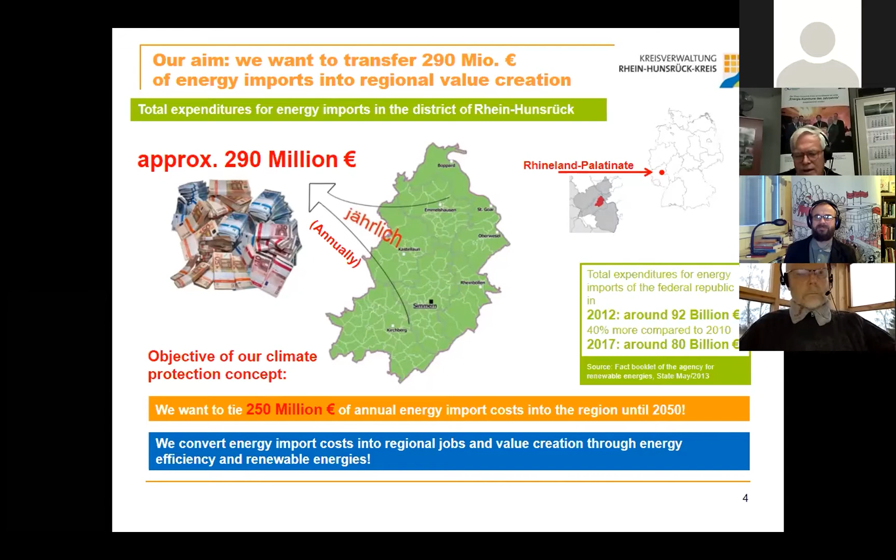Some years ago, we were very surprised that the total expenditures for energy imports in the district of Rhein-Hunsrück were more than 290 million euros, plus nearly 25 million euros in tax on electricity going to Berlin. This is for traffic, for heating, for electricity. And the question for us was: why do we send so much money in the direction of Putin and Arabic countries? We want to keep a lot of these millions instead of paying energy import costs. We want to create energy efficiency and renewable energies, so we convert this import cost. On the right side, you can see the large sums for the Federal Republic's energy imports — 2012, around 92 billion euros; 2017, around 80 billion euros. So there are a lot of chances for new kindergartens, schools, environment, nature, and so on.

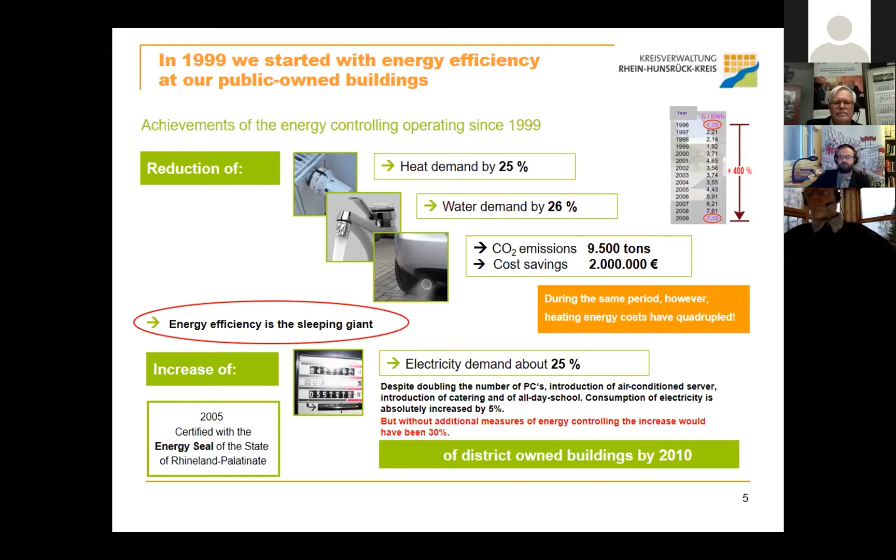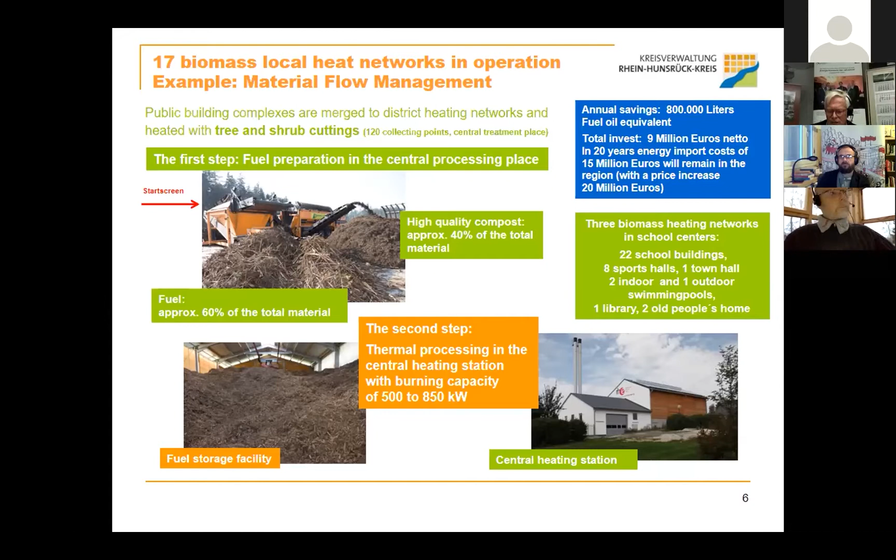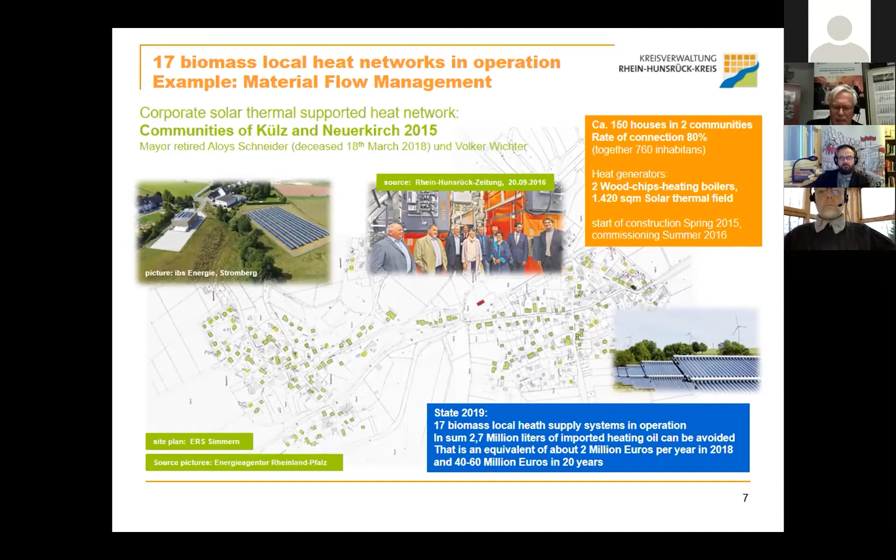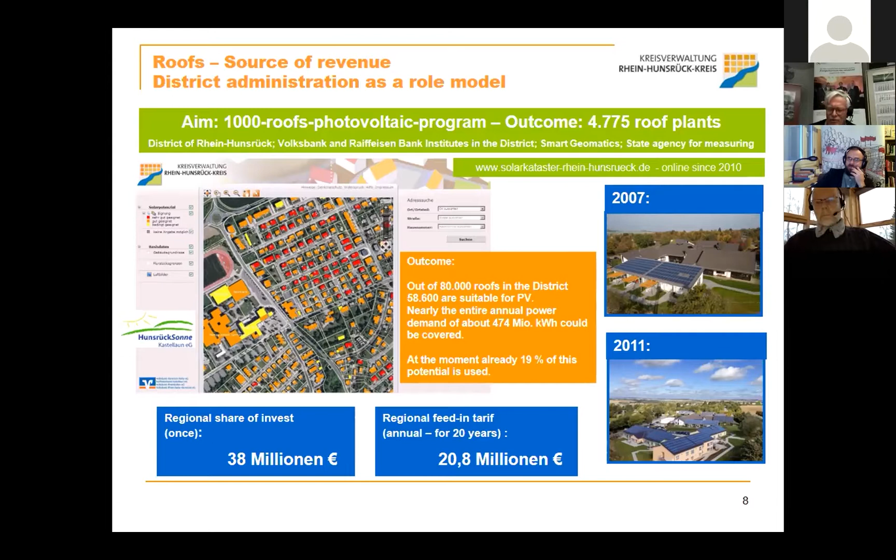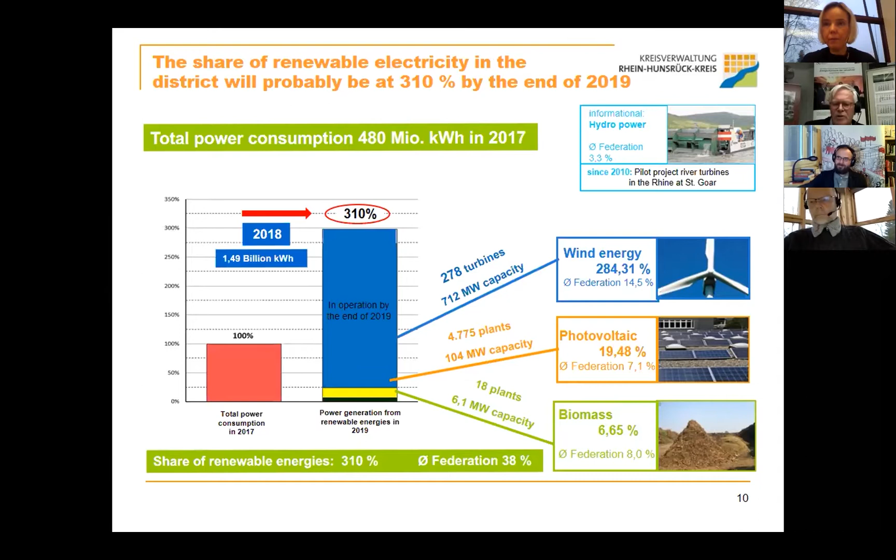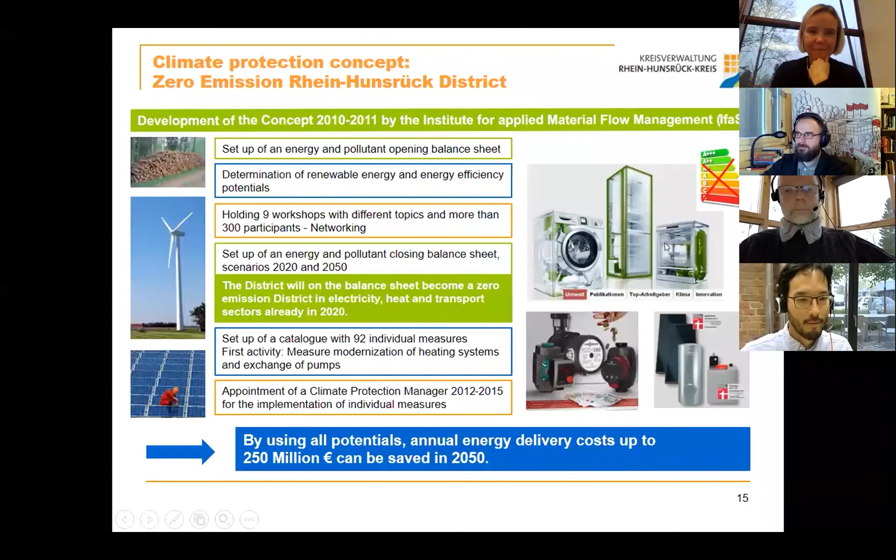Ja, 16. So we are on slide 16. Can you hear me now again? Yeah, everything okay? Please apologize, I will hurry. We were just talking, no, 16.

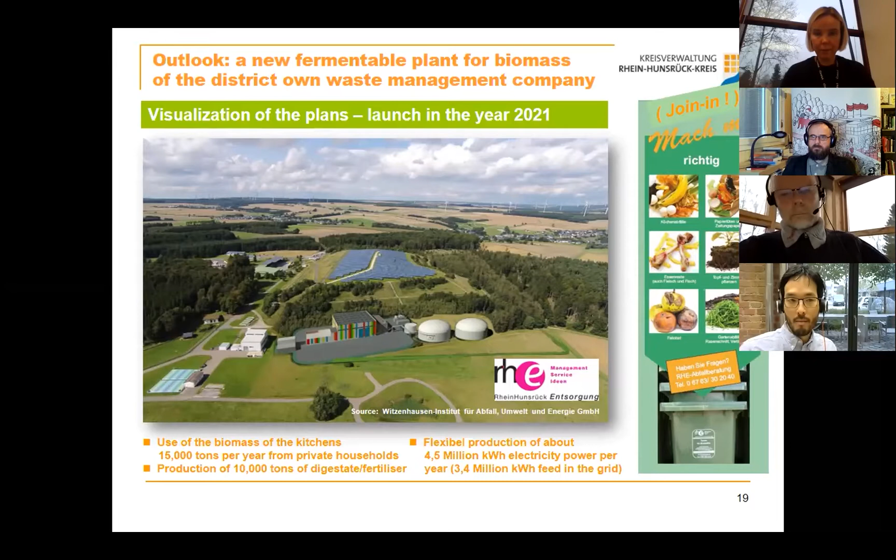His vision was that the money of the village shall remain within the village. That was for the farmers, for collecting the harvest and so on, and to buy fertilizer together as a village, by hundreds of people, for a better price. I think we do it the same way. We want to produce our own energy. We want to keep the value added in the region. And so I think Mr. Raiffeisen is looking down on us and is very glad.

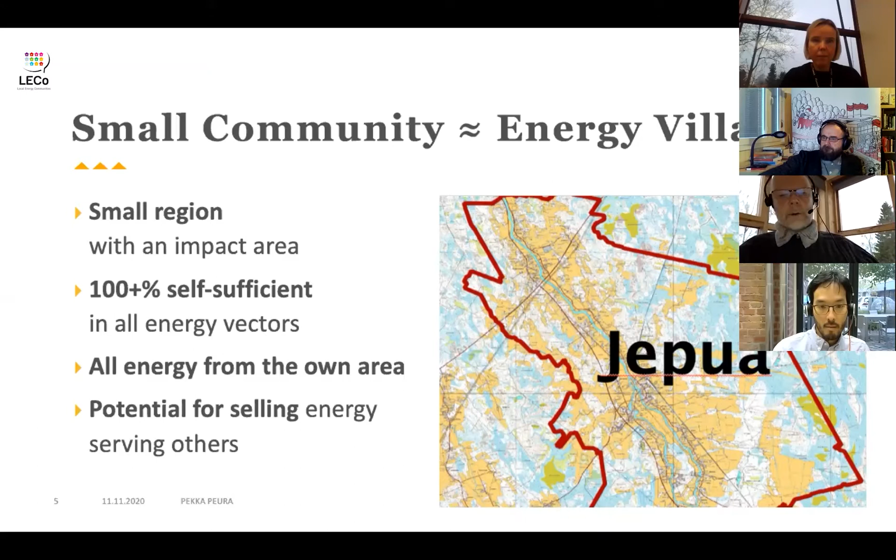We also already touched on the regional economy, and we know from our calculations that the average sum of money spent on energy is between 4,000 and 5,000 euros in Finland's rural regions, which is a huge sum of money per person, per family.

But even if we take a village of 100 persons, 500,000... 1,000 persons is 5 million. But if we take a number of villages, we get a really big amount of money, as we heard in Bertram's presentation as well.

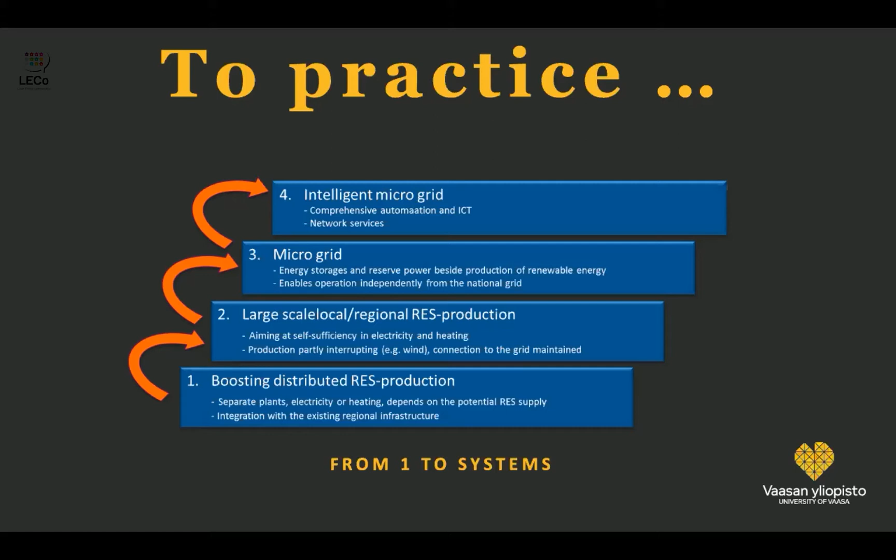We also have to remember that sustainable energy not only means production of energy, it also means minimizing the consumption of energy. So we talk about rational use of energy through different technical possibilities. And then we, of course, have to also produce energy, and there we have these renewable energy technologies. By different combinations of this, we can produce different degrees of energy self-sufficiency.

Again, one more picture about how to put this into practice. We usually, when we go to a village, follow this procedure: we take all the stakeholders with us. We let them say the vision and define all the possibilities towards implementation. Of course there must be some technical expertise and technology providers to put this on a realistic base. But this is just to depict the character of the process — we really need to take all the stakeholders with us.

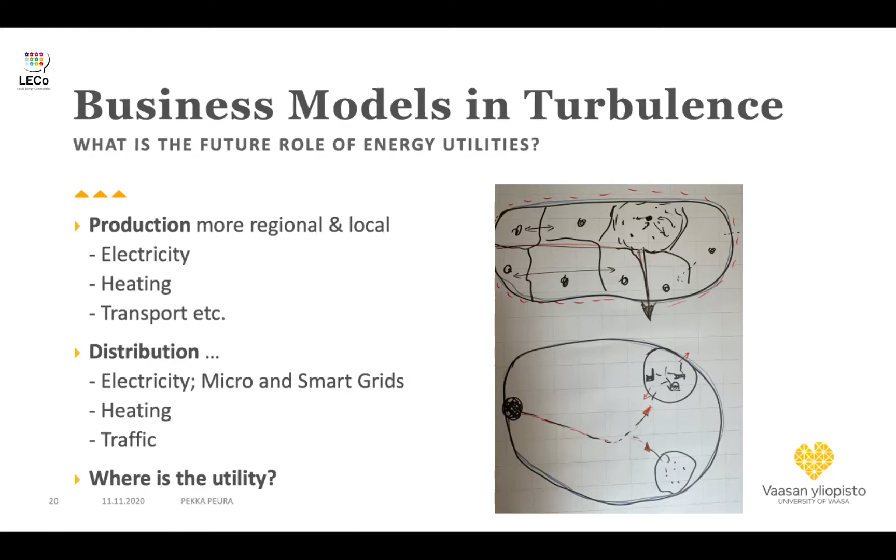Either they could be an active partner in creating this kind of system and structure, which is a long-term goal, or they can oppose it. But more and more, I've seen that energy utilities are turning to be active partners.

And if we take a vision, concluding all of this, what I've told is that we could really create a new structure into the energy sector, which means the centralized system doesn't disappear, but its role could be moved to serve energy-intensive industries and larger population centers, and it also might change and alter its raw material base. But the other side is to construct this distributed strategy, which is what renewable energy is mainly all about.

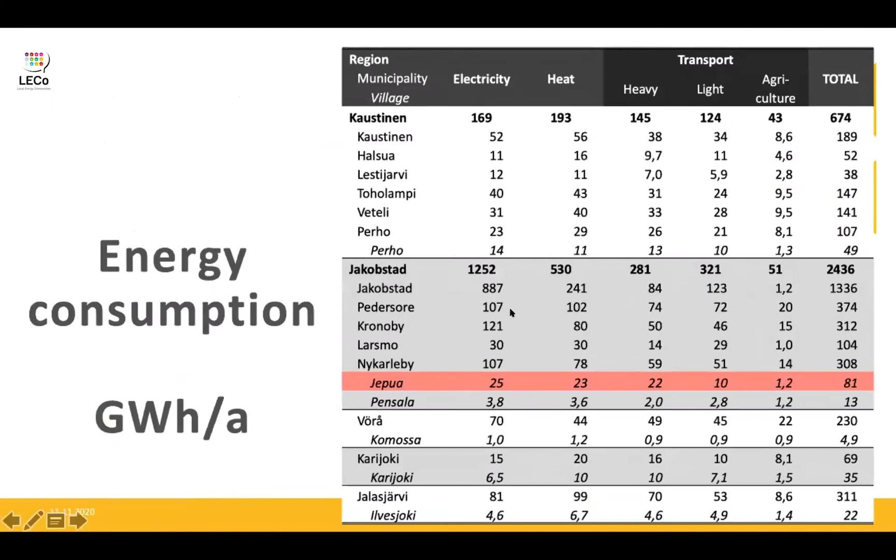My prediction is that the energy sector will experience this kind of disruptive change in terms of turning to and shifting to renewable energies. Thank you.

Thank you, Pekka, for these very interesting remarks, and for ending with such an encouraging message. That will wrap up the first session, and we will certainly hear more about the term energy village later in this conference, and also I think the microgrid approach is already practiced in the Rhein-Hunsrück area. So Pekka, whenever you have the opportunity to visit the Rhein-Hunsrück, it's highly recommended.

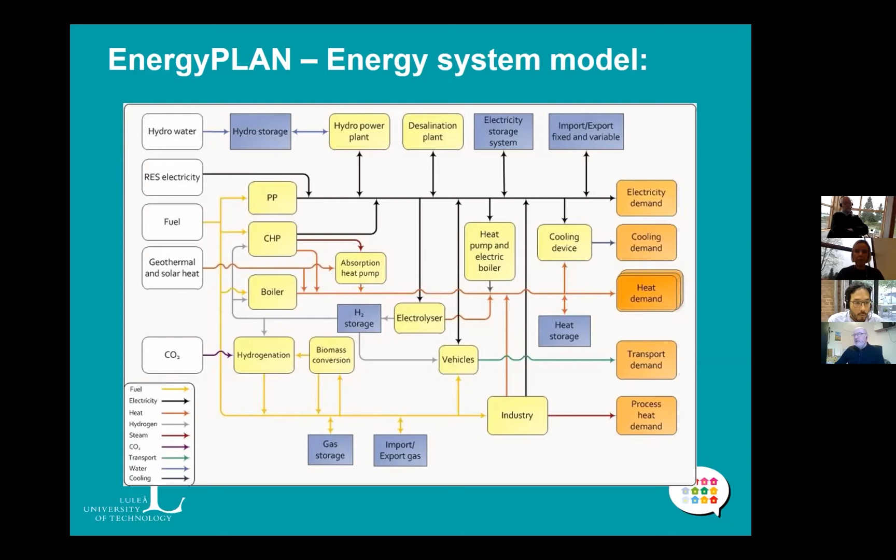How does it look like? We have user interfaces for defining demand. This example is for heating - individual heating in the upper part and district heating in the lower part.

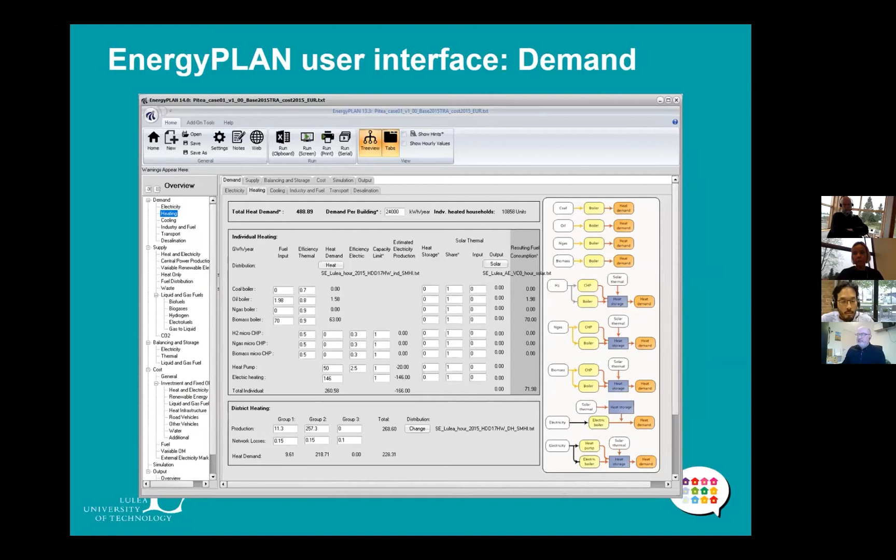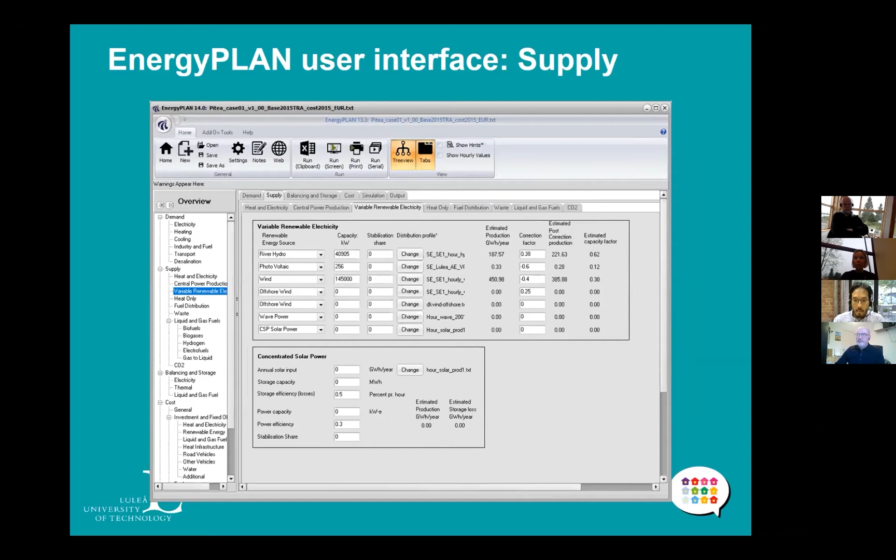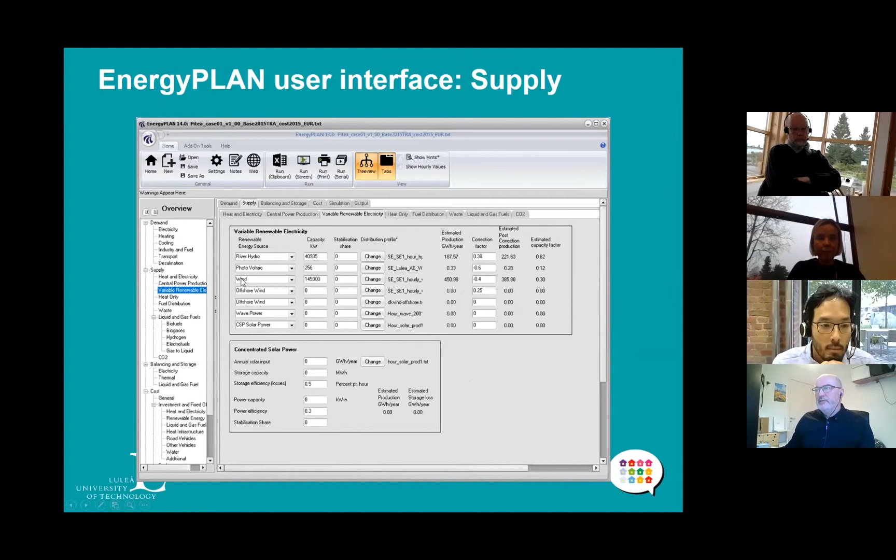This is a slide on the supply side where we can enter different variable renewable electricity production, like hydropower plants, photovoltaic, onshore wind and offshore wind, and so on. Then, of course, we have the cost tabs - investment costs, economic lifetime, and fixed operation and maintenance costs, and so on.

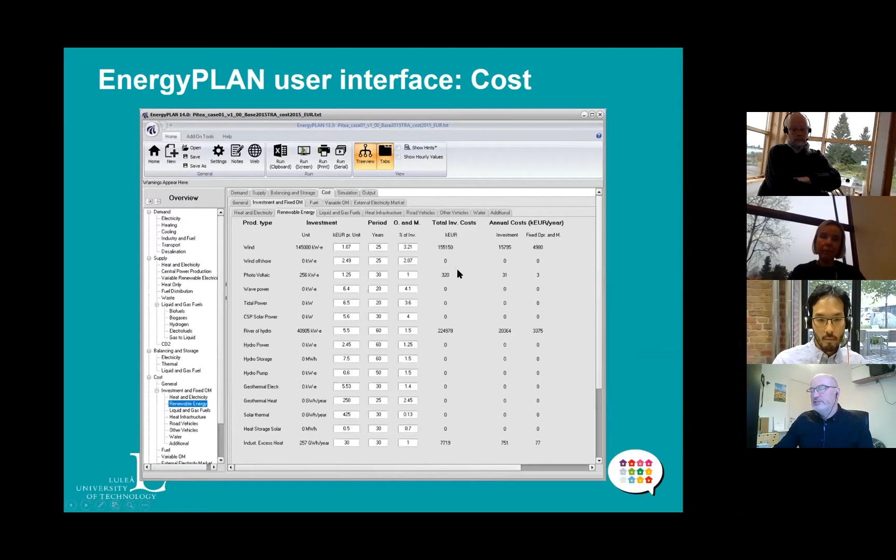And then there are other sheets for other technical details for the different technologies. What do you get out of such an approach, where we entered for most of the communities both the electricity part and the heating part?

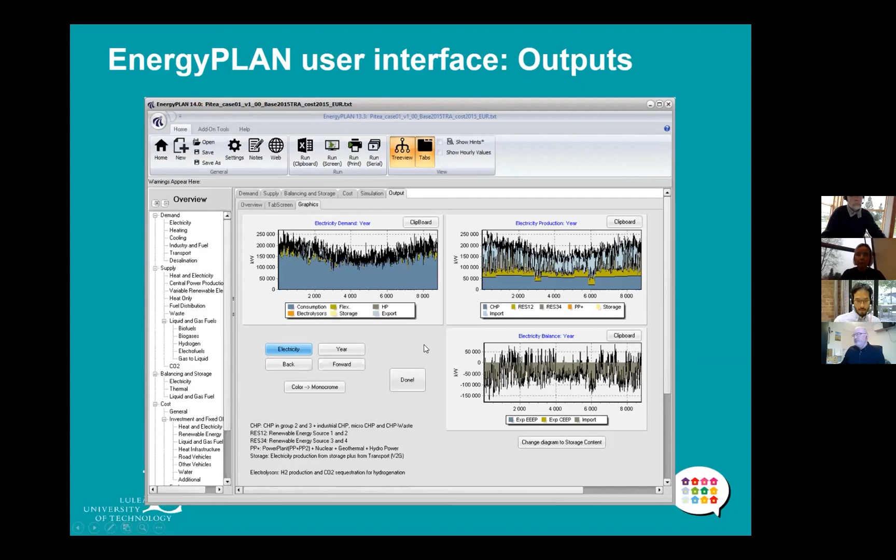You get on one side a number of graphs which you can easily copy and paste into reports. As we talked about visualization, you can change the time period you look at - an entire year, months, weeks, or even certain days. This is useful when you want to observe how solar and consumption match, and so on.

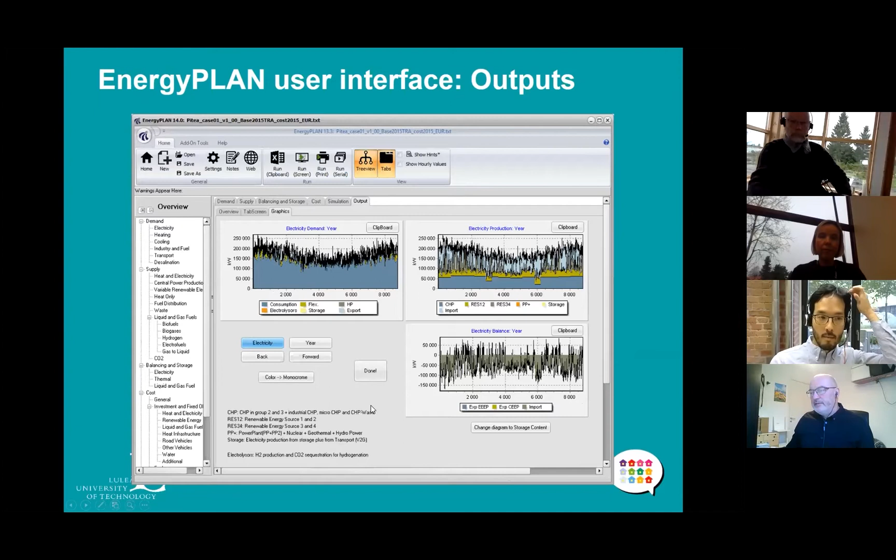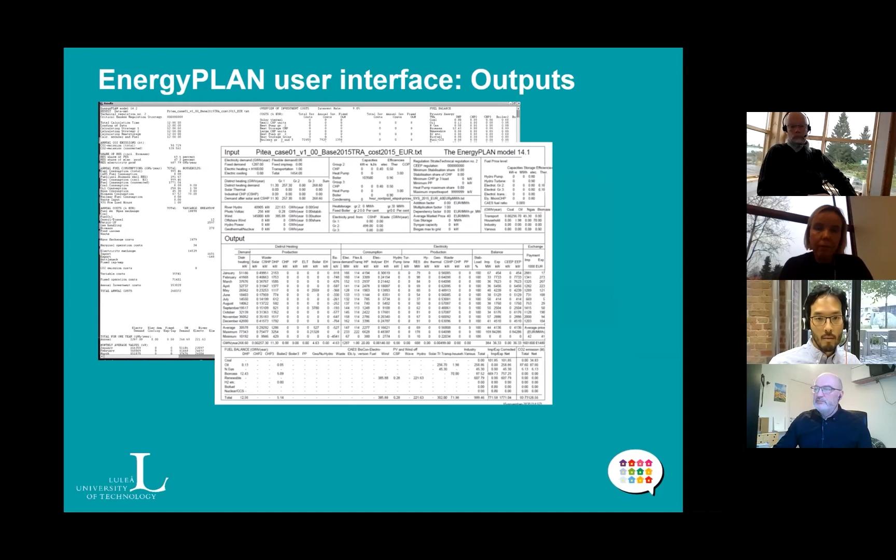But on the other side, you also get a lot of raw data in tabular format, which you can export to Excel and create your own diagrams. There are also some predefined formats in EnergyPLAN which give a more compiled overview about the energy system you have just modeled.

So the process in our approach, and almost always when you do an energy system approach, is you create a reference case - an energy system model, which is always a simplified view of reality. Then the next steps are to think about what are the most realistic options to implement: efficiency, solar energy, heat pumps, and so on.

And then you get results like this, which we have done for 13 examples in this project. From the left-hand side, you have all the energy consumption stacked up in these blocks. The lower part is electricity import and electricity consumption, then we have biomass consumption in this case, and district heating.

As we go along and implement different options, we see that we can reduce energy consumption by improving efficiency. Then we add solar energy locally, which means we reduce the imported electricity, and so on. We go along with different options which are feasible in this community project.

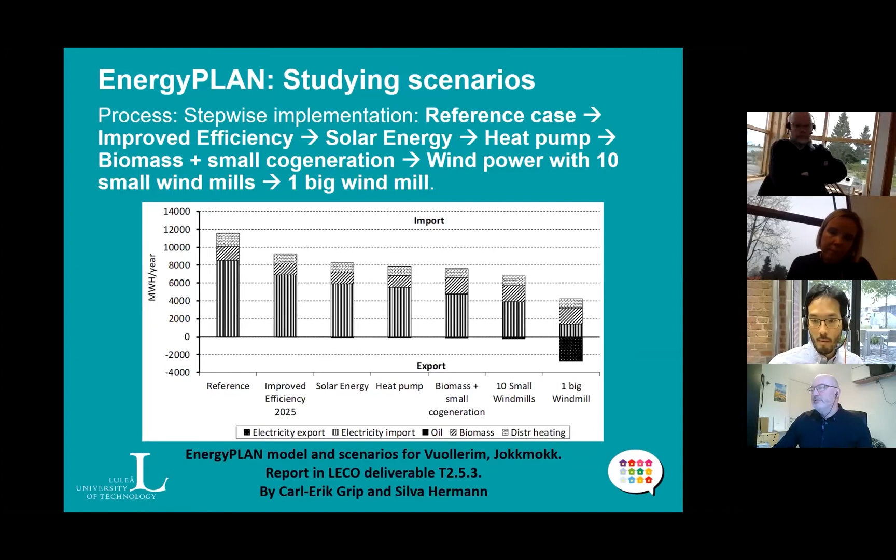In other cases, we had micro hydropower, for example. We had biogas plants, which we implemented in EnergyPLAN and could present nicely to the communities.

The outcomes from this work package, where I was involved and responsible, came after all this work of understanding the policy, what is around the community, and inside assessments of getting data. We get what we called - inspired by other terms - the Community Sustainable Energy and Action Plans.

We finally produced 3 for Finland, 5 for Ireland, and 5 for Sweden, which then through our project partners have been used in workshops, etc., to work together with the people on the ground.

The content of this included an overview of policies and regulatory frameworks which affected this project, an overview of available funding sources in the different countries, and then we analyzed the supply potentials - solar, wind potential, hydropower potential, biomass potential in the community - and then, of course, the results from the systems approach.

We have the tabular input data, we present the reference energy system, and then we go through the scenario assumptions and present the scenario results as shown in the previous slide.

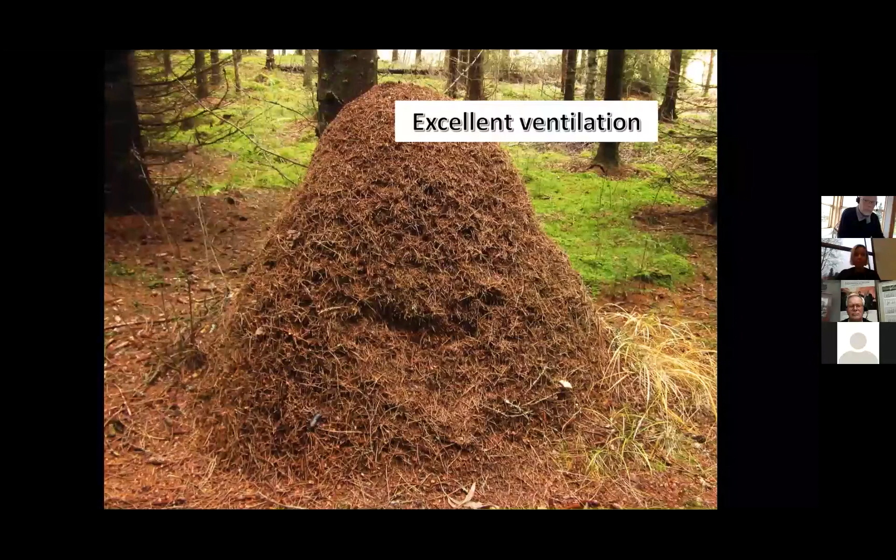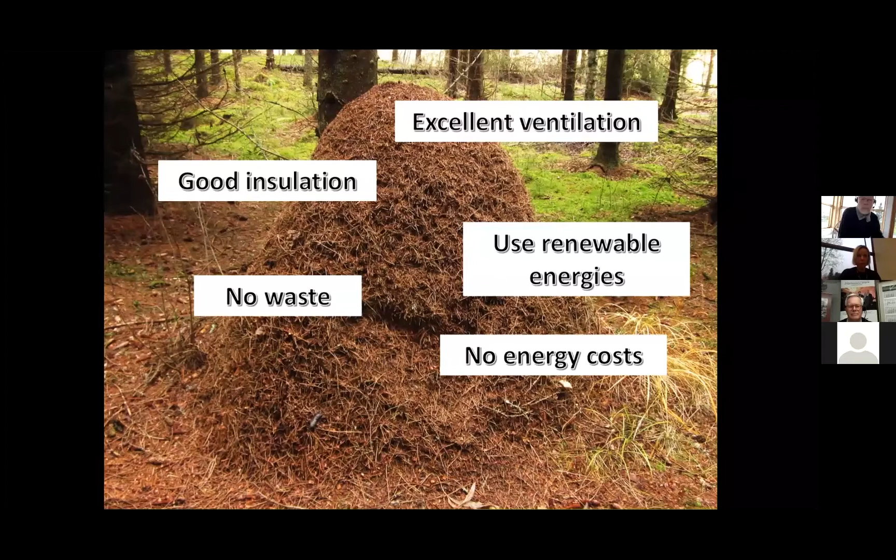And if you agree with me, then you might be interested in the tools that we developed in the LECo project. And if I use the word 'you', it means for me that you might be a community member, you might be someone from the university world, from academia, or you might be a local and regional authority. And we heard already in the presentations so far a lot about the tools and what... oops, it doesn't work, I don't know.

Sorry for that. Now my...

So what I just want to focus on is our LECo one-stop shop. You heard already about that a little bit earlier in the presentation, our learning center, local energy communities net. And here you find all the reports, I listed them, and we heard more about some of them already. What I want to do is to focus on just 3 of them, a very, very short look.

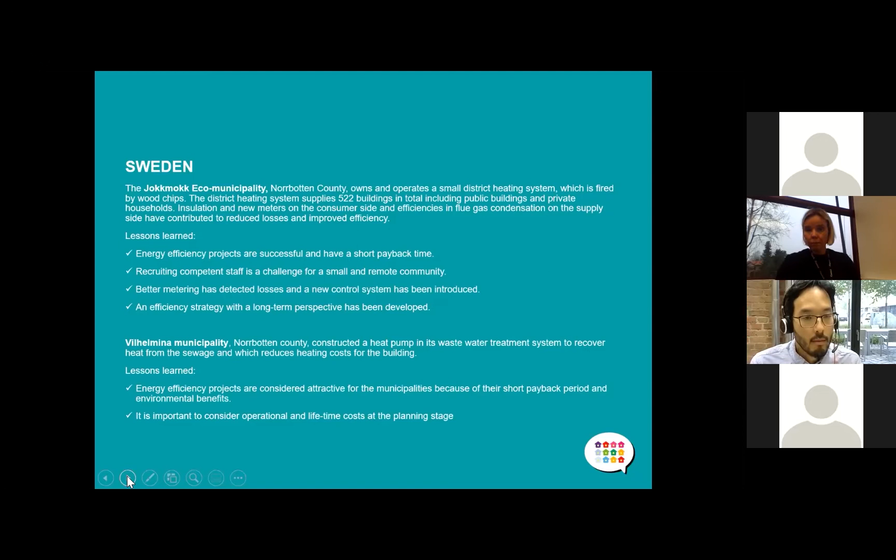And it's the lessons learned there that energy efficiency projects are considered attractive for municipalities because of their short payback period. It's important to consider operational lifetime costs at the planning stage.

Another example in Germany is the outdoor pool. It was formed as a result of a citizens' initiative, and the lessons learned were that a small membership fee of only €6 per year was essential for citizens to become members, and members get a sense of contributing to the pool, which is an important facility in the community.

There was another example, an energy cooperative in Capel with a district heating system. It demonstrates how local citizens, business and the municipality can cooperate to establish an efficient, sustainable heat supply infrastructure with stable and affordable prices.

A few difficulties that can arise include lack of technical support, lack of administrative support. In Ireland in particular, the planning process can be too long, it's difficult to get grid connection, and there are issues with funding. The successful strategy is the bottom-up approach: community trust and buy-in, engaging with young and old citizens, liaising with multiple stakeholders, exploring the potential of multiple projects and funding mechanisms to deliver value for money, and capacity building.